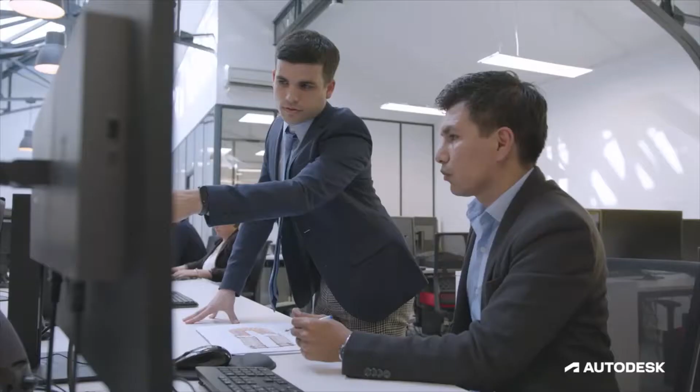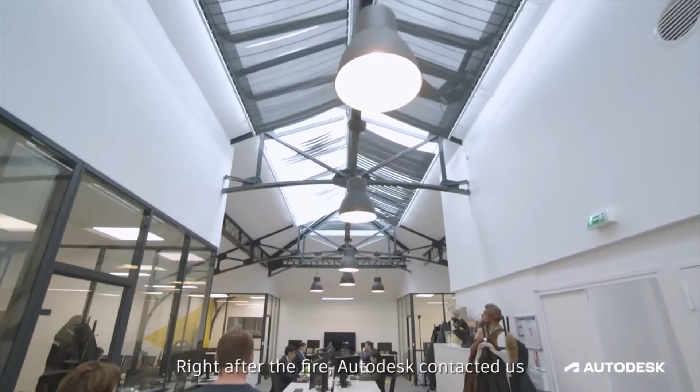On se souvient tous du 15 avril 2019, du sinistre. Je me rappelle à l'époque avoir pris très rapidement conscience de la complexité de la mise en sauvegarde de Notre-Dame. Très vite après l'incendie, Autodesk nous a sollicités pour réaliser un modèle BIM de Notre-Dame de Paris à partir des données qu'on avait déjà constituées avant le sinistre, et avoir une maquette telle que construite.

Je suis tailleur de pierre, restaurateur monument historique de formation. J'ai notamment travaillé en tant que technicien des méthodes sur les chantiers de restauration sur Notre-Dame de Paris dans les années 90. Ensuite, j'ai fondé Art Graphique et Patrimoine en 1994 pour amener les outils numériques au métier de la conservation et restauration du patrimoine.

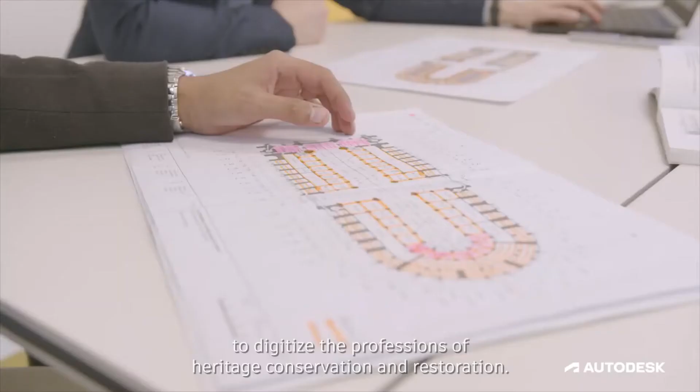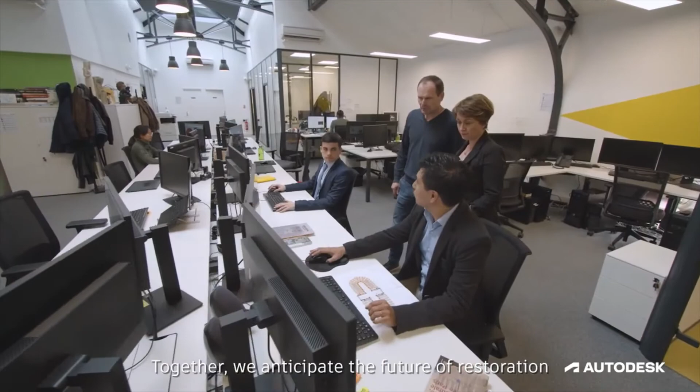Chez AGP, nous avons une équipe pluridisciplinaire qui a une connaissance fine du patrimoine architectural et historique. Notre savoir-faire, c'est l'interprétation intellectuelle et technique d'un bâtiment. On est la seule entreprise dans notre secteur à avoir le label de l'entreprise du patrimoine vivant. On fait partie aussi du groupement des entreprises de restauration de monuments historiques, avec lequel on a toute une réflexion globale sur ce qu'est la restauration du monument historique.

En 2010, on est intervenu avec Andrew Tallon pour faire un relevé, entre guillemets, global de Notre-Dame de Paris. C'était un relevé assez complet.

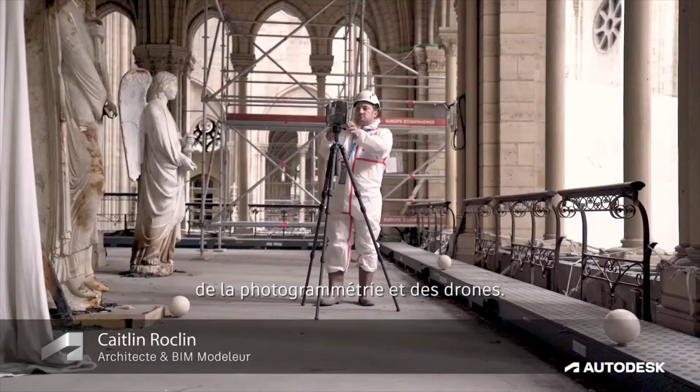For Notre Dame, our BIM process included the survey of the site. This was the laser scanning, the photogrammetry, and the use of the drone. It's almost like an X-ray of the surface. And this led us to create the 3D BIM, which is the 3D geometry as well as all of this information included. Notre Dame itself is a very challenging project.

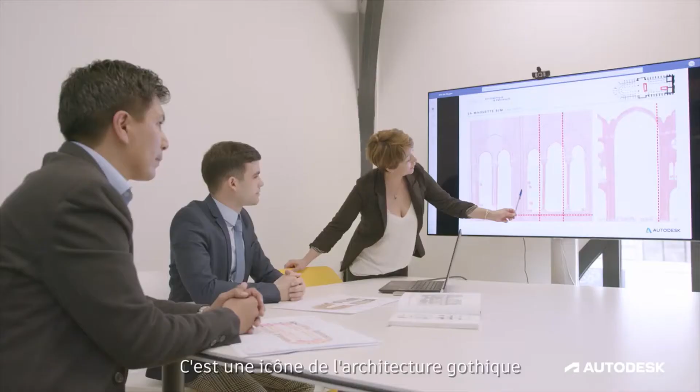It is an icon of Gothic architecture in which nothing is straight and nothing is rectangular. A good example are the vaults. There's over 180 vaults and none of them are identical. Every one of them has to be modeled individually.

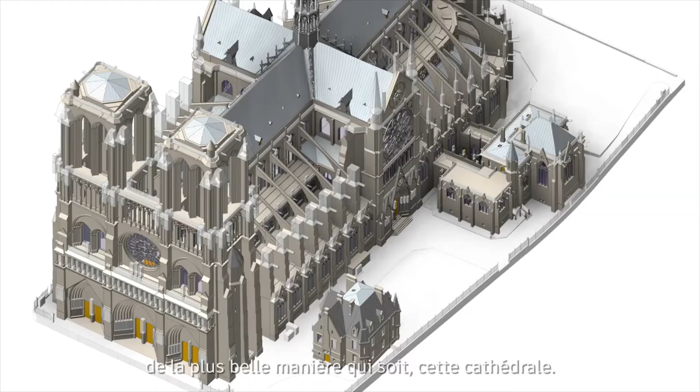And the final challenge was how to combine the savoir-faire, the working expertise here at AGP, with the realities of Notre Dame—how we can use our knowledge with stonework and software in order to represent this cathedral as beautifully and as intelligently as possible.

BIM is undeniably a technology that contributes to the safeguarding of our heritage, and we consider BIM itself as a form of preservation, as a snapshot of these historical monuments in time.

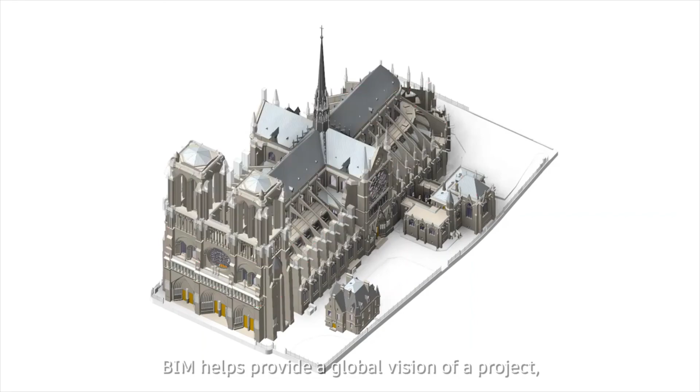On peut dire que les atouts et les applications du BIM sont nombreux. Le BIM nous permet de donner une vision globale de l'édifice tel que construit, de planifier et coordonner le chantier avec les corps d'état qui vont collaborer pendant la restauration de l'édifice, et en même temps de faire la scénarisation de ce projet de restauration.

En résumé, la maquette intelligente issue du BIM devient une nécessité pour la préservation du patrimoine.